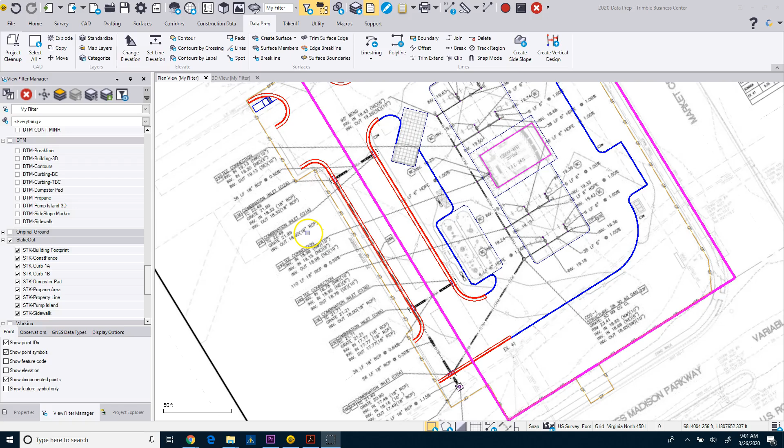All right, so the first thing I'm going to do after I got the PDF in is go to my layers from my CAD file, and I'm going to turn on the utility structure, utility line, and the storm structure. I mean, I can turn on the electrical too, but I'm going to focus just on this storm information.

So by turning that on, you'll see that it creates or brings in this line work here for these structures. So what I'm going to do is temporarily turn off the images.

One thing to note, if you go to select on the image, I know this is page 7, which was the one I just brought in, and go to properties. What I can do is go to the Project Explorer, pick on that image, then go to properties, and rename this to drainage plan so I can identify it. Go back to my Explorer, pick on this other image, go to its properties, and call this grading plan. That way it makes it a lot easier for me to turn them back on.

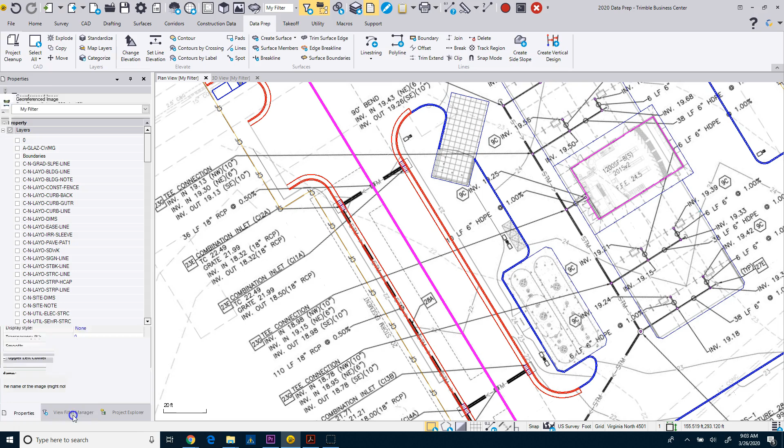So when I go to my view filter manager, I'm going to temporarily turn those off so I can see these a little bit better.

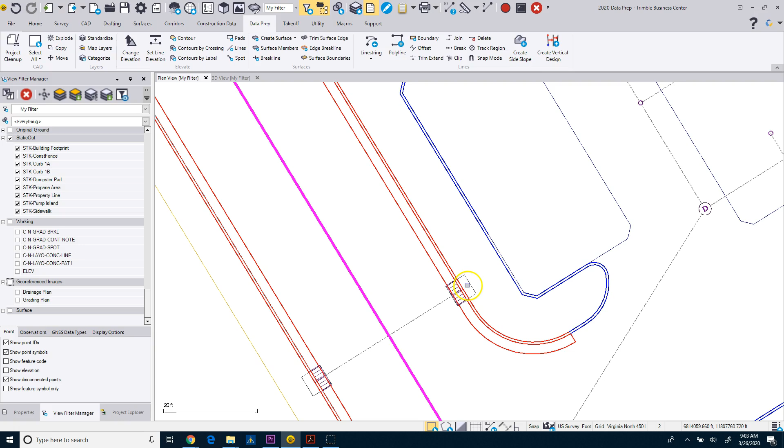So it looks like there's a bunch of lines here on the structures. All I want is this box, this rectangle, or the square here. So what I'm going to do is hold my control key down and shift select these objects, because these are the structures that I'm going to have to stake out. Now I can use the box or the circle, or select both.

And we can do this as well. If we want to come in and select these structures, we can do that.

And what I'm going to do is go to my properties tab under my layer, and we'll go ahead and create a new layer here. Again, this is going to be stakeout, so I'm going to put STK dash storm, and we'll just call it structures. And we'll go ahead and set this to a color that we want, maybe a bluish color here.

And again, we can set a thickness if we want. I'm going to protect it because I want to save this later. And we'll create a new category for our utilities, so I'll come in here and give it a new layer group.

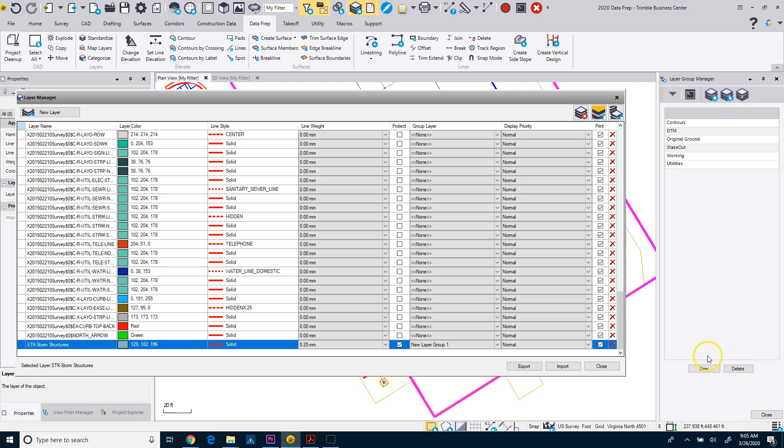Close, and now we've moved those objects. Now it should have storm structures. See, the color is this 129, 182, 196. So what I'm going to do here is go back to my layer filter.

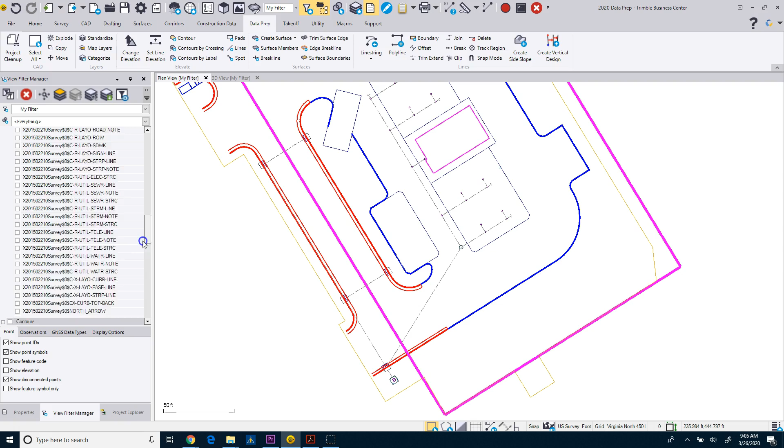And I'm going to turn off my stakeout so it leaves just utilities. I'll do a window select, go back to properties, and set my color to by layer, and that will pick up whatever layer the color is. Now I can come back and deselect, and now you can see I've changed those.

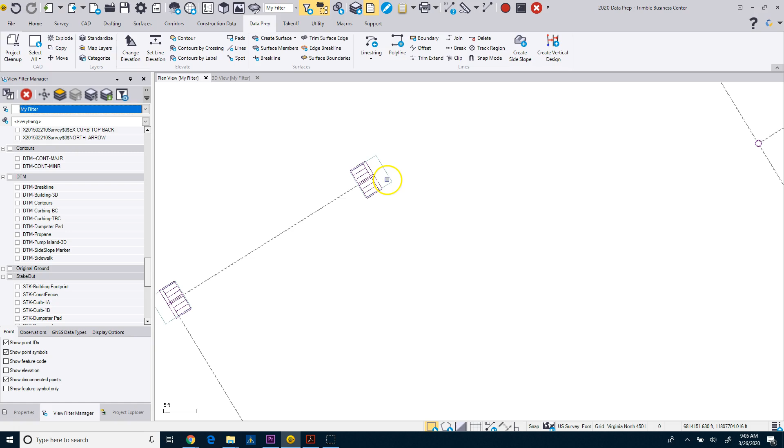So now I can come in here, and if I want, I can do the same thing with the pipe. I can hold my control key down, select all these lines, which are going to be my pipes. Again, we can do all that roof drain stuff as well, but I'm just going to focus on this piece here.

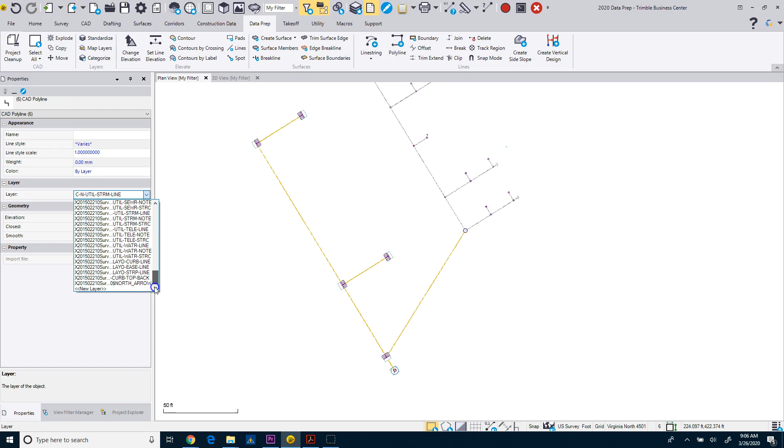And go back to properties, and we're going to do the same thing. I'm going to create a new layer. Again, you don't necessarily have to create and separate the pipes and structures, it's just something that I'm used to doing. So storm pipe, and same thing, we're going to set that to probably this dark kind of bluish color.

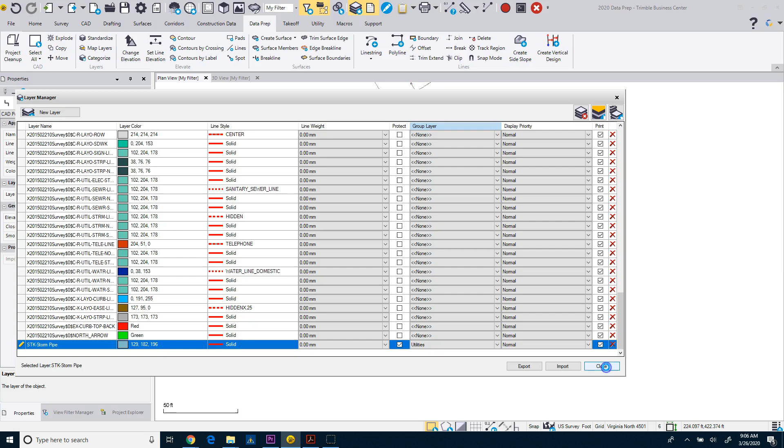We'll protect it, and I'm going to put it into that Utilities group. I mean, I could put a thickness, but I'm just going to skip that piece, and we'll close that.

Okay, so now I can elevate these. So what I'm going to do is turn on my drainage plan, and I'm going to elevate these structures. And I'm going to show you that in the next video.